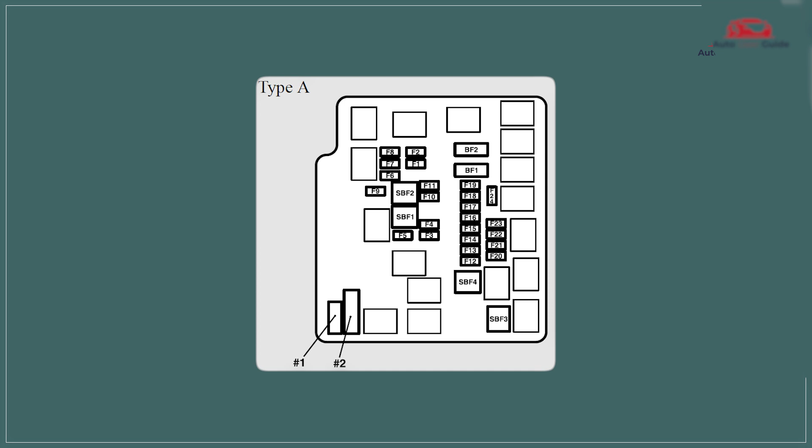Engine compartment fuse box. The engine compartment fuse box protects key engine and electrical systems by housing fuses and relays. It prevents damage by breaking the circuit if there's an overload or short. This ensures safe operation of components like the ignition, fuel system, and cooling fans.

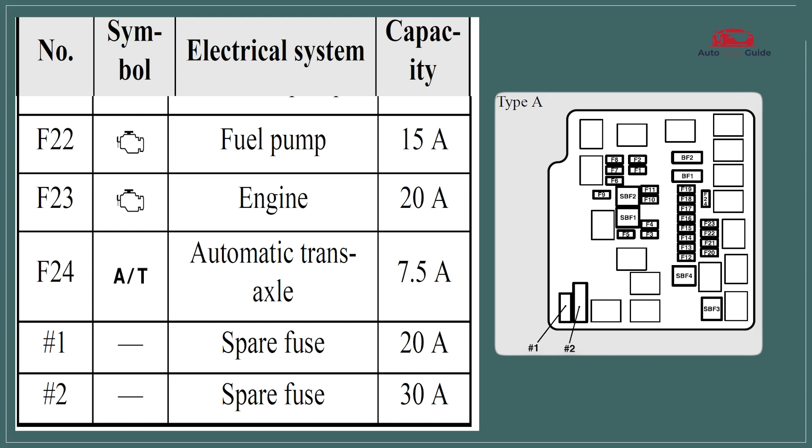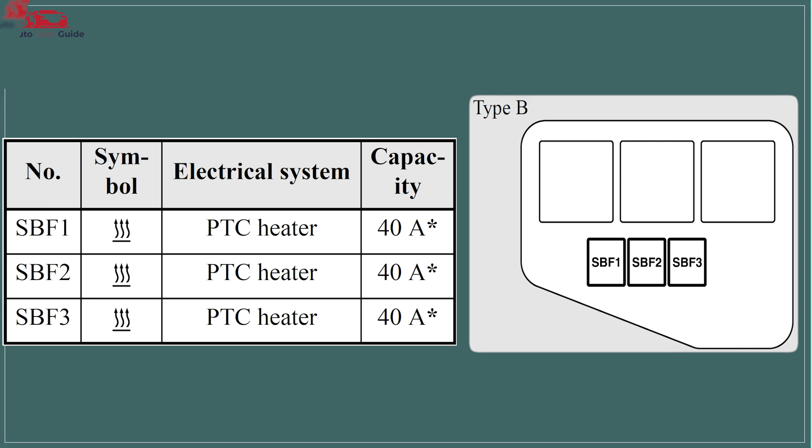Passenger compartment fuse box. The passenger compartment fuse box is located under the dashboard, usually on the driver's side. It protects interior systems such as the audio unit, cabin light, power windows, and climate control. This box helps prevent damage from electrical overload or shorts.

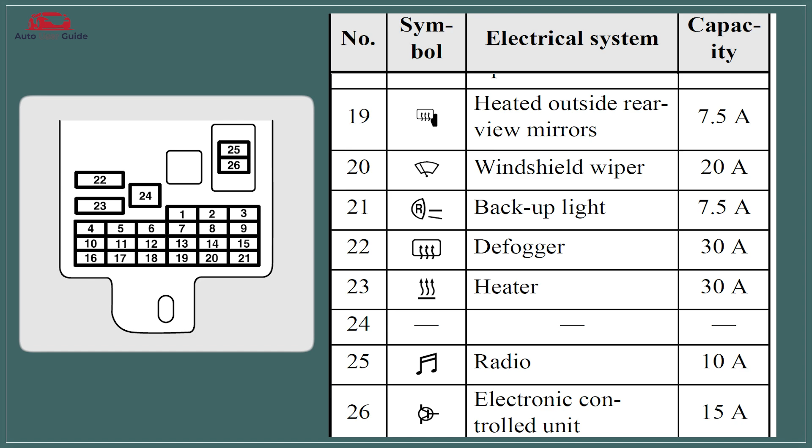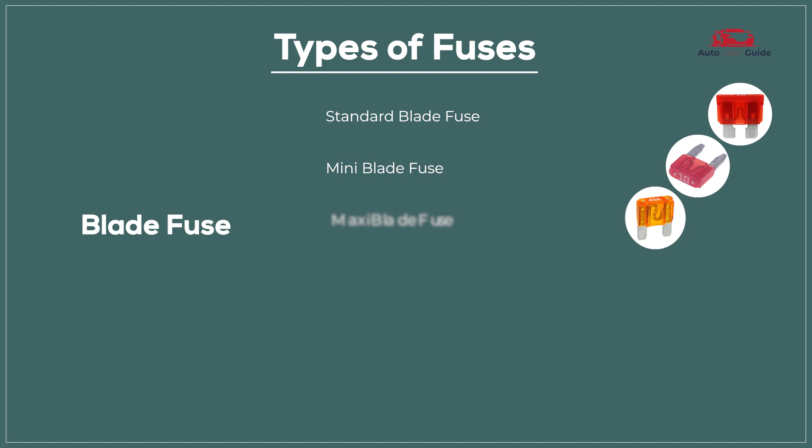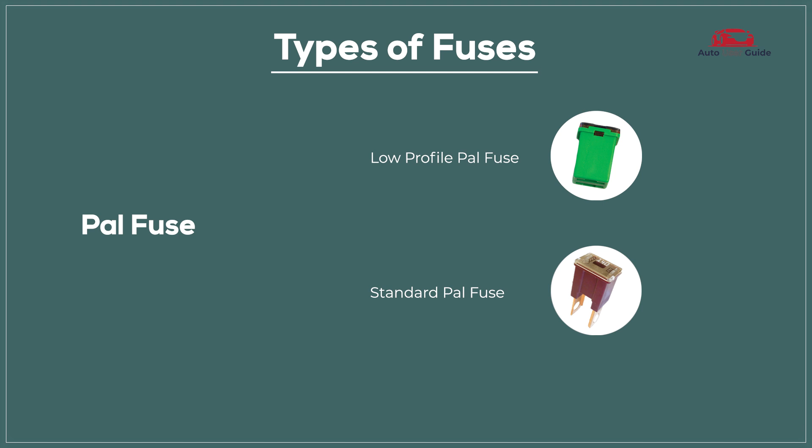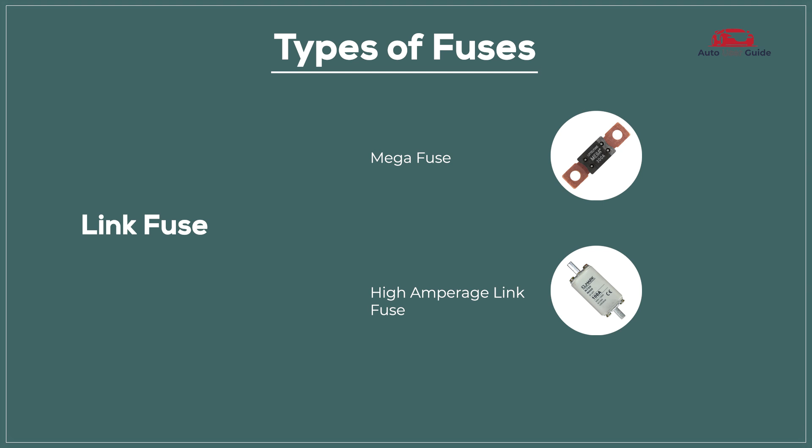Types of fuses: blade fuse, standard blade fuse, mini blade fuse, maxi blade fuse, micro 2 fuse, micro 3 fuse, J-case fuse. Glass tube fuse, AGC fuse, SFE fuse. Ceramic fuse, Bosch fuse, DIN fuse. PAL fuse, low profile fuse, standard PAL fuse. Link fuse, mega fuse, high amperage link fuse.

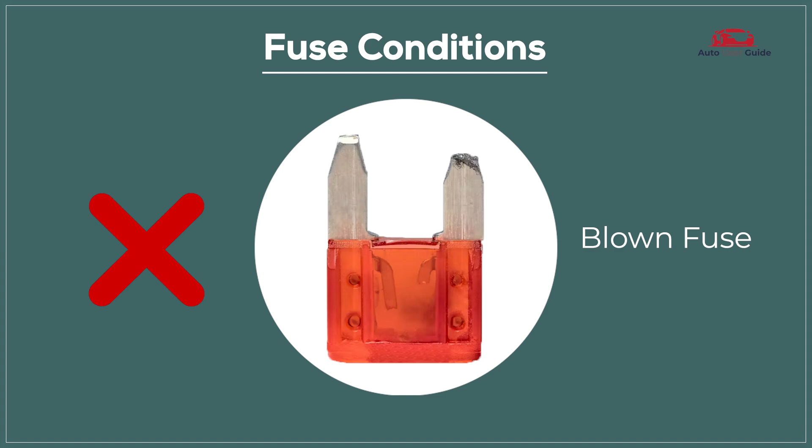Fuse conditions. Blown fuse: a blown fuse means it's no longer functioning and needs replacement, while a perfect fuse is in good working condition and performing as expected.

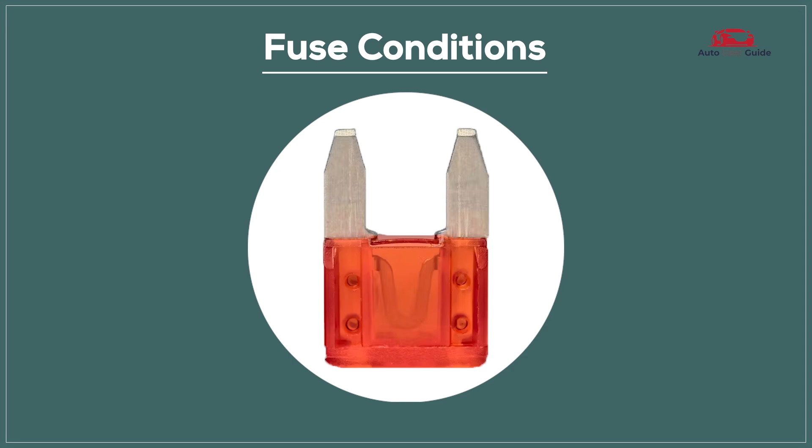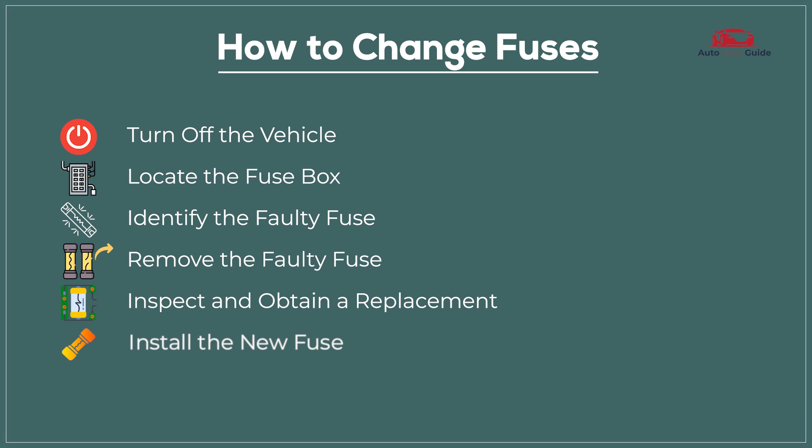How to change fuses: Turn off the vehicle. Locate the fuse box. Identify the faulty fuse. Remove the faulty fuse. Inspect and obtain a replacement. Install the new fuse. Test the replacement.